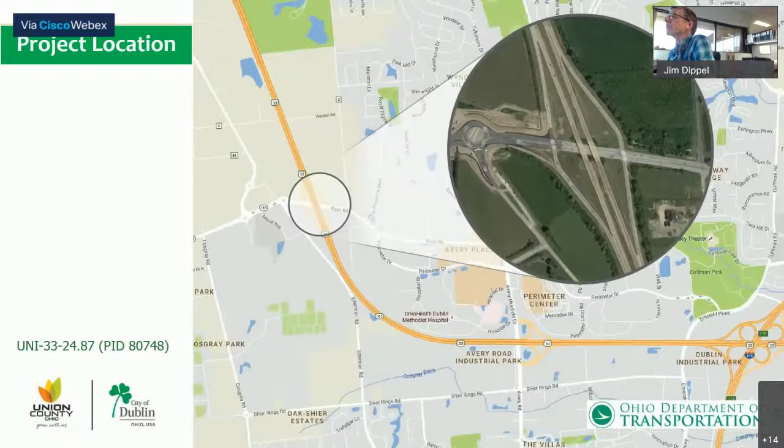Congestion and safety have always been a big concern for this area for many years. We're currently exceeding design capacity by at least 200%. We know that more than 65,000 vehicles use this interchange every day, including about 7,600 trucks. With the new FedEx facility coming in on Industrial Parkway, that should go up another 7%, and will also include a substantial number of additional trucks.

With all of the improvements the city's already made over the last 12 years or so out here, including relocation of Industrial Parkway, 3 roundabouts have been constructed, and a 4th will be coming soon over at Cosgray Road and 161. The city's made a lot of progress in providing what we'd call a complete traffic solution for this area that works for the whole area. This interchange project is really the final big step of making that all work together.

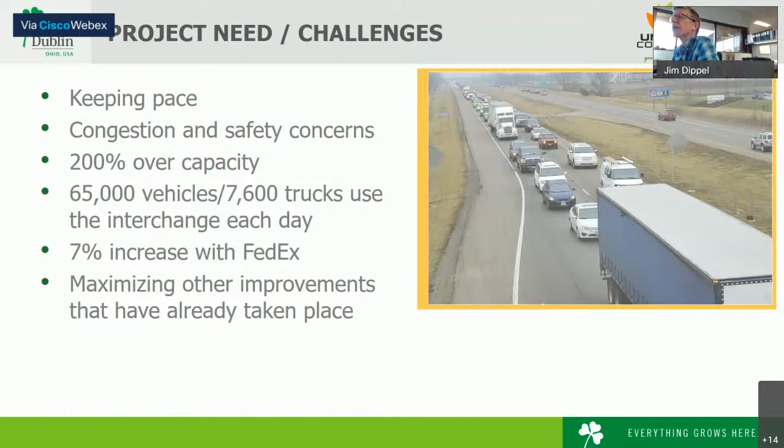Just some history and current conditions, a little background. The current interchange out there now was constructed in the late 1960s, opened in either '69 or '70. It's a standard rural diamond interchange, which was adequate 50 years ago when it was way out in the country, but obviously today it's way under capacity.

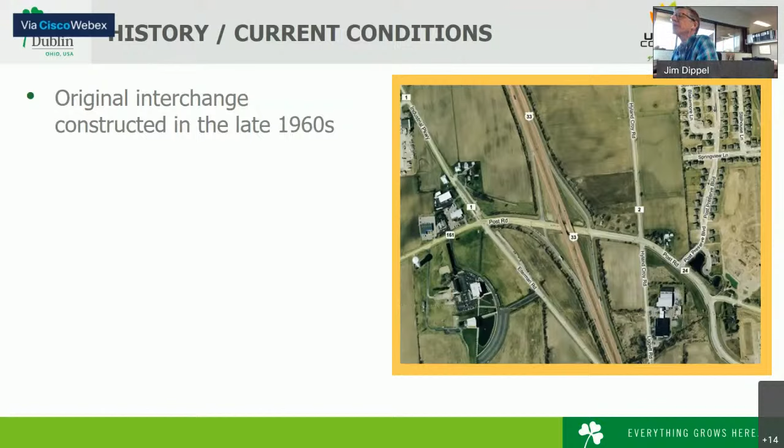Since this project has developed through a long process over many years, we wanted to share and review a timeline with everyone, particularly for folks newer to the area who may not know the history. Interchange studies for this project really began about 20 years ago, and it was determined fairly early on that the entrance to Post Preserve subdivision would have to move due to state design standards for interchanges. That's a very important factor in this project, and we're going to discuss that in much more detail in just a minute.

In the early 2000s up through 2006 particularly, there were 5 public meetings to discuss alternatives for the relocation of that Post Preserve entrance. There were very heavy collaborative sessions in those meetings to work out the best solution. Based on comments from the residents, it was refined down to 2 alternatives, and then a final alternative ultimately was chosen and approved by the council.

In 2008, the Post Preserve entrance design was actually done at about the same time the interchange design was being done. During that 2008-2009 period, 2 more public meetings were held with the Post Preserve folks to develop and refine the actual features of the new entrance, what it was going to look like. Unfortunately, construction of the interchange project was held back at that point due to a funding gap, but construction did proceed on pieces of it in phases. I wanted to share that with you a little bit.

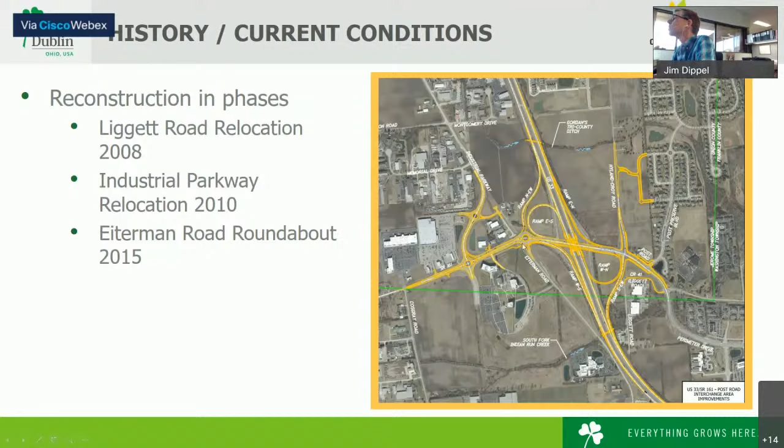That brings us back to the final phase, which is what we're talking about tonight: the reconstruction of the interchange itself. That reconstruction has a number of components. First, it includes reconstruction and widening of State Route 161 and Post Road from Eiterman to Liggett, from the east side of the Eiterman roundabout all the way down to Liggett Post.

It'll also include some revisions to this existing roundabout as part of the project, to make it function a little better with the interchange and with the new ramp that's coming in from the north.

Another major part of this project is construction of new ramps. All the ramps will be new. The off ramps will be new. The on ramps will be loop ramps now. These loop ramps enable us to eliminate signalized intersections down here on 161, reducing left turn conflicts and improving traffic flow and safety.

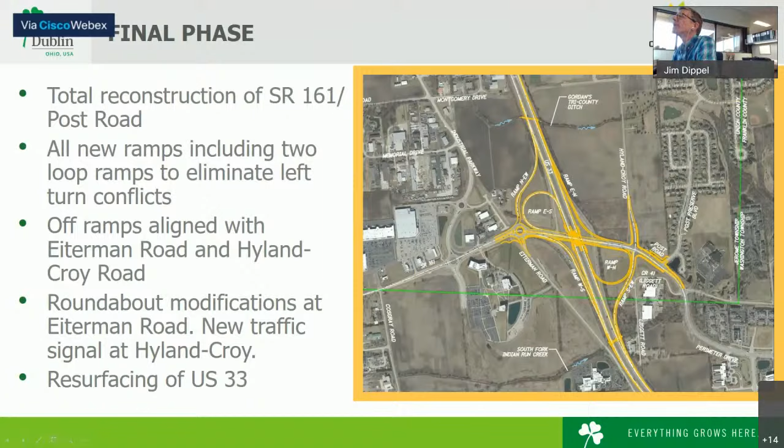Also, US33 will be resurfaced for the entire length of the project limits here. And in keeping with Dublin's typical high standards for appearance, there will be some extensive beautification of the interchange along with this. You can see in the diagram here, this is just one of the loop ramps.

I didn't show it all, but these are very large areas here. There's going to be use of a lot of ornamental grasses to reduce the amount of mowing that has to be done out there. There's going to be some mounding, and you can see how a lot of the features, the softscape and hardscape, are curved, to complement the curves of the interchange ramps for that sizable infield space.

The types of trees will be quite varied. That's partly for shape and color, but also to prevent any possibility of major loss in the event of an unexpected disease or insect problem, like the ash borer or something like that. So variety is very good. There'll also be evergreens incorporated, so there will be some wintertime form and color.

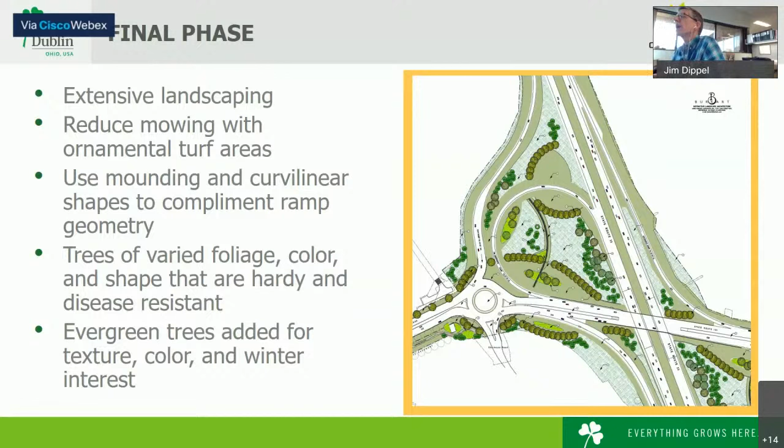Last but not least, the US33 overpass bridges will be completely replaced with this project. The US33 is only being resurfaced. It will remain 4 lanes like it is now, but the bridge, since we're reconstructing it in anticipation of future widening of US33, will be constructed with 6 lanes. It'll be striped so you're only using the 4 lanes, but those extra 2 lanes to the inside will already be there for the future when the widening does someday occur.

There will be significant aesthetic enhancements to the bridge, providing what we hope to be a nice gateway for both Dublin and Union County. It'll be a little different than a lot of the other overpass bridges in Dublin, with a more clean, contemporary look, with this thin white arch across the span. But the ribbon walls that you see extending out will still incorporate some of the more traditional looking Dublin stone.

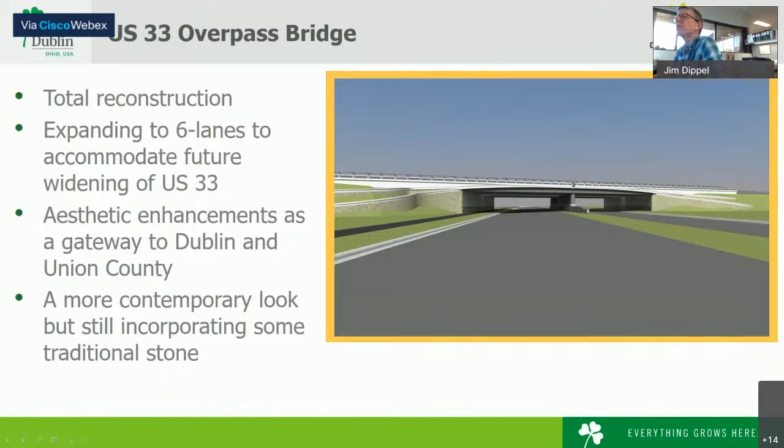Right-of-way is obviously a big part of any major project like this. But the good news is that all of the right-of-way was purchased by the city back in 2008 before the project was delayed, except for one parcel located along the westbound off-ramp. There have been some changes to the design since 2008.

The original design had a roundabout at Hyland-Croy and Post Road at the ramp terminal. That is now going to be a signalized intersection. Because of that, there is a parcel that is going to require some additional right-of-way. But again, the good news is that it's a piece of property the city of Dublin owns, so it won't affect any private property owners. Dublin will be able to dedicate that for the project at no cost.

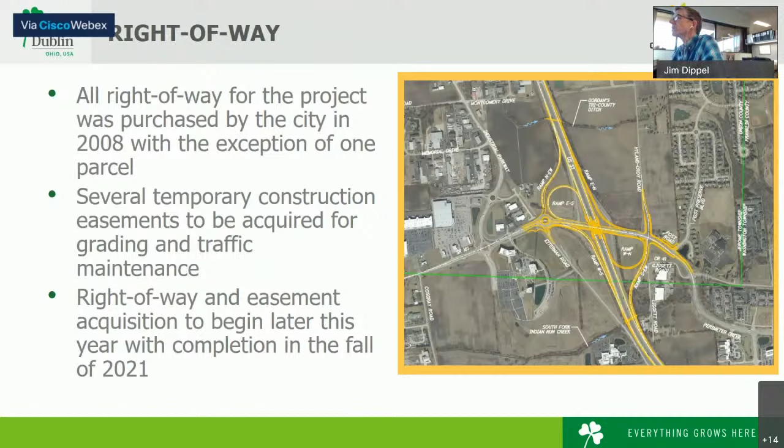There will also be a small number of temporary construction easements that will need to be acquired for some areas where there's just a little extra room needed to construct the project, but not needed to maintain in the future. So on completion of the project, those will be restored and returned back to the property.

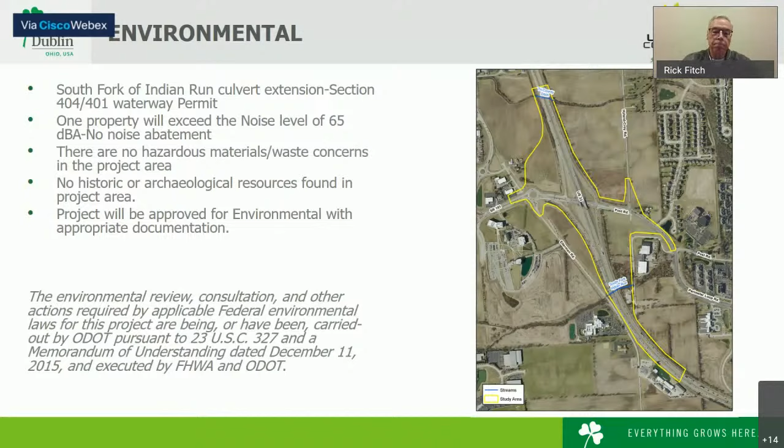With that, I'll turn it back over to Jim. Okay, thanks, Rick. Appreciate it.

Okay, well, that brings us back to a very important subject, and that's Post Preserve neighborhood. I think as we're all aware, the project requires relocation of the Post Road entrance to the subdivision over to a new location on Hyland-Croy Road.

The locating and configuration of this new entrance was really a collaborative effort over a couple of years with extensive public and neighborhood involvement. The location shown here is the one that was selected from several alternatives as the best solution.

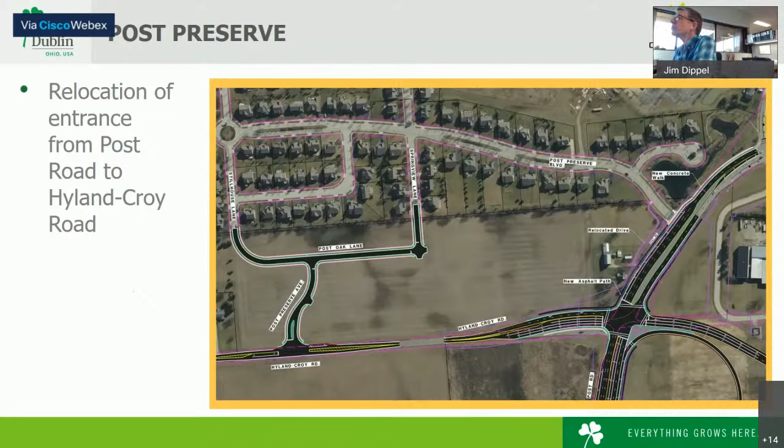We realize, and the city realizes, that this represents a really big change, particularly for those of you that live in the southern portion of the neighborhood. So it's important to review why this change is necessary.

And basically, it all boils down to something called limited access right-of-way, or as we often call it in the industry, the LA. The Ohio Revised Code gives ODOT the authority and responsibility of setting standards for the use of limited access right-of-way. And those standards require for this type of interchange that no intersection be located within 600 feet of a ramp.

So in the early years of the project development, ODOT let us know that this rule would apply and must apply, and that it would also preclude a right in, right out due to its proximity to both the ramp and Post Road.

And also on the exhibit here, the area marked additional access restriction comes from rules set forth in ODOT's access management manual, and also just from sound traffic engineering.

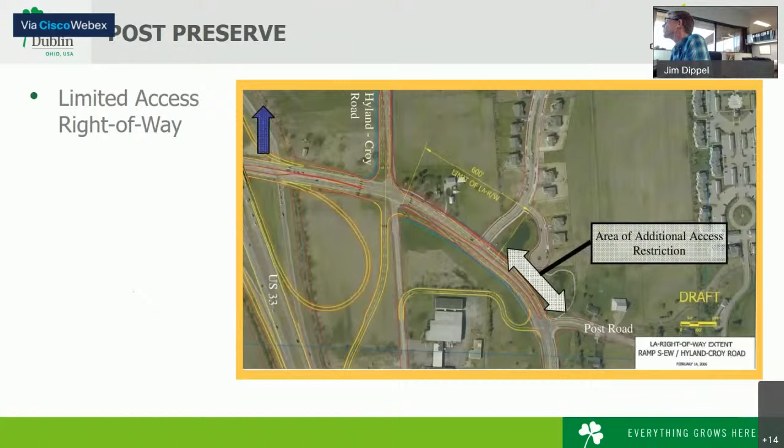Bottom line is that Post Preserve Boulevard couldn't be relocated to the east because it would be too close to the Post Road intersection. So traffic-wise, it was a no-go. Really, from an engineering and drainage standpoint too, it would have been very difficult, very problematic to try to move the roadway over in that direction.

This is just kind of a boil down of the schedule we looked at earlier. Just wanted to summarize, there were 5 meetings in 2006 to develop an alternative for the new entrance, and then 2 more meetings in 2008 and 2009 that occurred during the final design of the entrance, just to work out with the residents the details of the entrance.

And this is an enlargement of the exhibit we saw a few frames back. I just wanted to point out that along with the boulevard style entrance, Hyland-Croy will also be tapered and widened so that there'll be a designated left turn and a designated right turn lane, to make things work smoothly and improve the safety of the intersection.

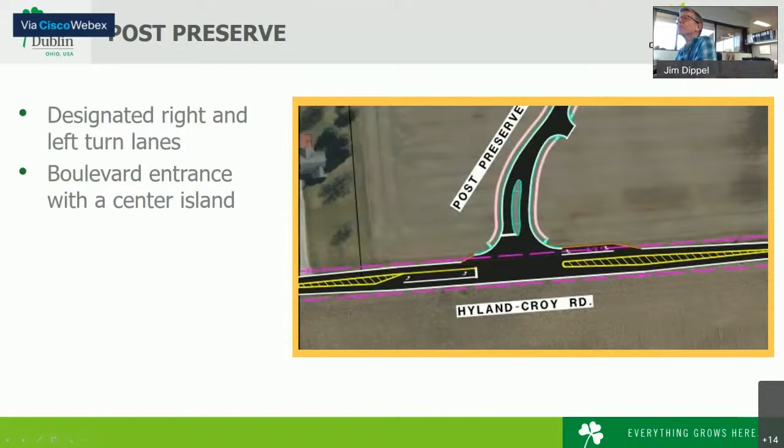So just getting into the design of the entrance in a little more detail, obviously beautification was a real key element for the design. The goal was to maintain the upscale standard of the neighborhood and also to try to meet or exceed what you have currently on Post Road at that entrance.

Again, this design was developed with extensive input from residents through a process that involved many public meetings, like I mentioned before. A number of different plant materials were vetted for this, different uses of fencing and so on, stone fences as opposed to rail fences and that kind of thing.

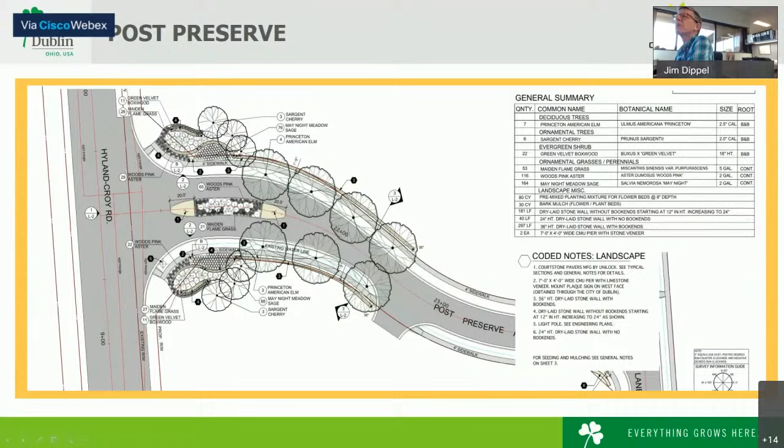So these elevation view renderings were also done. You can see here, this is looking in from Hyland-Croy. You can see the pedestals with the brass plaques. In the side view, you can see the stone walls coming up kind of behind the pedestals.

And then when we get to the sidewalk, we have this nice, more formal dry laid stone wall with the bookends on top. The dry laid stone walls really have a stately look. A lot of people would consider it an upgrade from the rail fences you see down at the Post Road entrance.

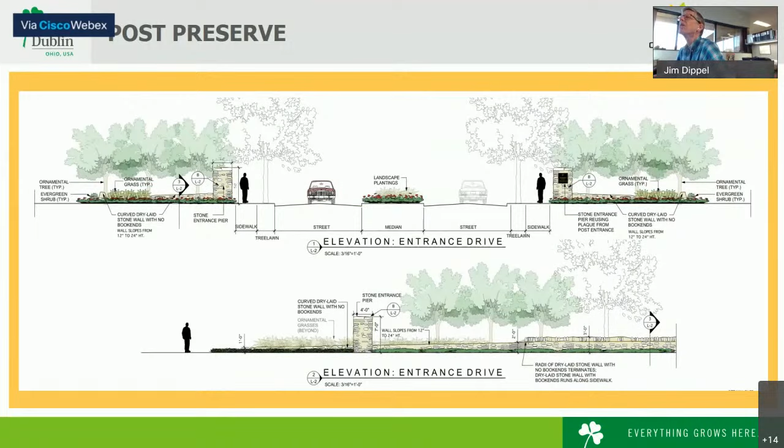Okay, maintenance of traffic during construction. Traffic will be maintained at all times on US 33, 161, and Post Road. Traffic will also be maintained on Eiterman and Hyland-Croy roads, except for one full closure each for a short period of time. The maintenance of traffic plans are still being worked on and finalized, revised from before, but it will be a 4-phase plan that will coordinate the opening and closing of ramps and so on as they're constructed, so that traffic will be maintained in all directions.

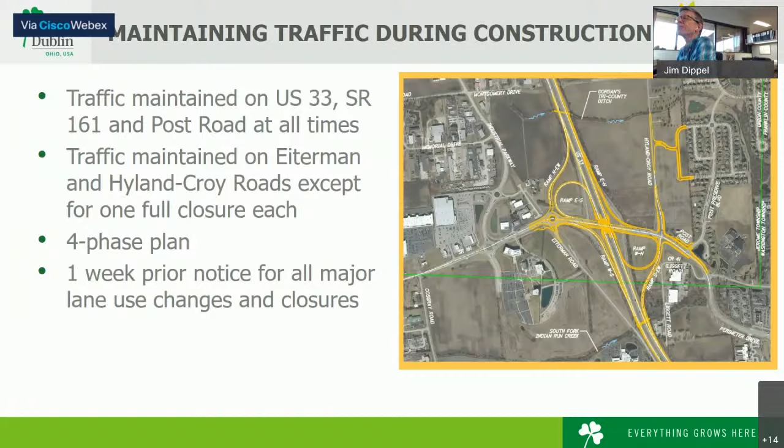And then just a quick schedule update. As Rick mentioned, the environmental document is being completed right now, so that's 2020. We're updating and finalizing the design plans now, and that should be finished up next spring, 2021. Right-of-way acquisition should begin towards the end of this year, continue into 2021, and should be complete by late summer, early fall. Interchange construction itself will start in probably late spring 2022, and will go 2 to 2.5 years, so it'll be complete by fall of 2024.